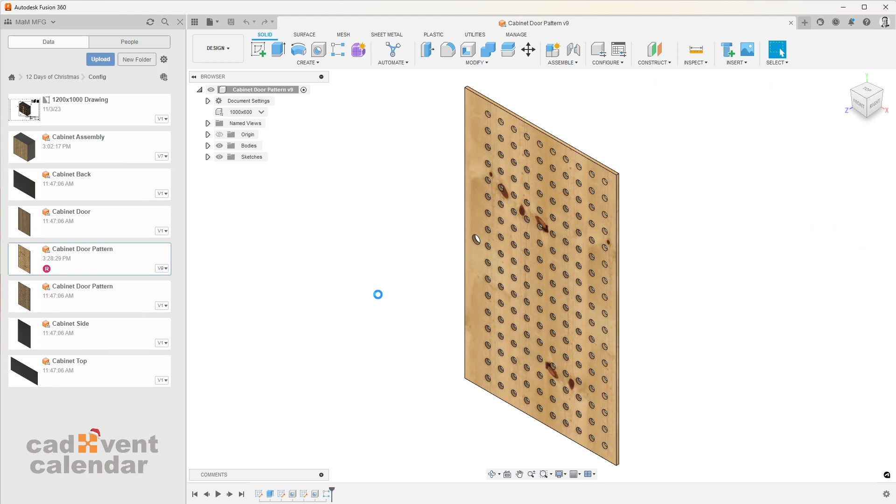Now, we can't talk about Fusion 360 without looking at what it can do from a manufacturing perspective. And I'm literally scraping the surface today because I'm not going to pretend to be an all singing, all dancing computer-aided manufacturing whiz kid. I can run a toolpath, I understand what that's doing, but I'm going to scrape the surface.

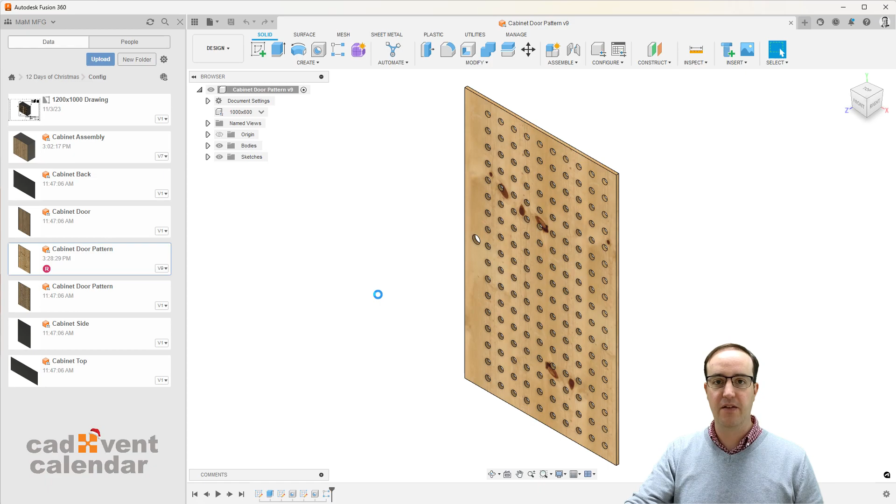But take it from me, the amount of functionality there is in here to allow you to generate anything from a simple toolpath like I'm doing today all the way to a multi-axis toolpath. Fusion 360 has the ability to do that for you, and that can be extended with separate subscriptions to allow you to do so much more, including machine simulation, to be able to see how the machine's moving around and what it's doing at any particular point in time, and checking for clashes and things like that.

So with this file that we had open earlier on, we're going to go straight into our machining and manufacturing environment. We could create a setup. We don't need to do that inside of Fusion, but we could if we wanted to. I'm going to go straight in and create a 2D contour, selecting the geometry of this top face.

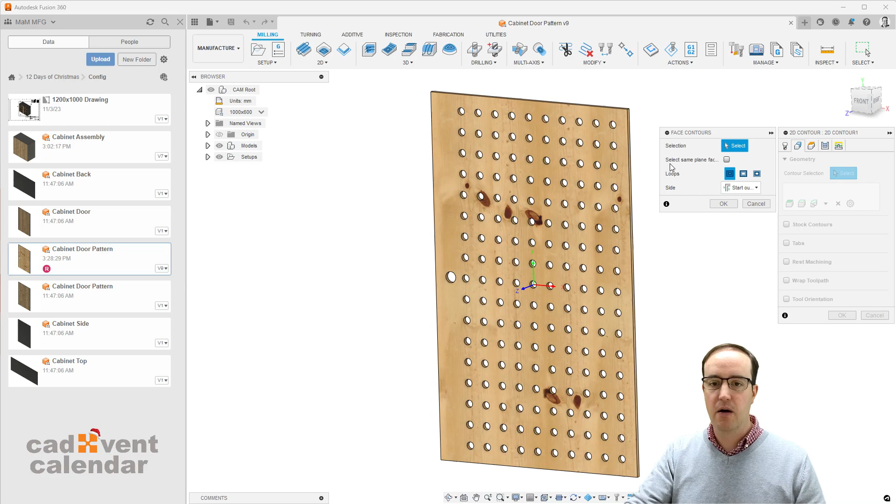If I hit OK, Fusion will then try and generate a toolpath for the outside and every single one of these holes. Might not be the best way of doing it, but this just shows you how quickly you could get started. I'm going to set my bottom to be the underside of the model, to make sure that the depth is correct. And then I'm going to go ahead and press OK.

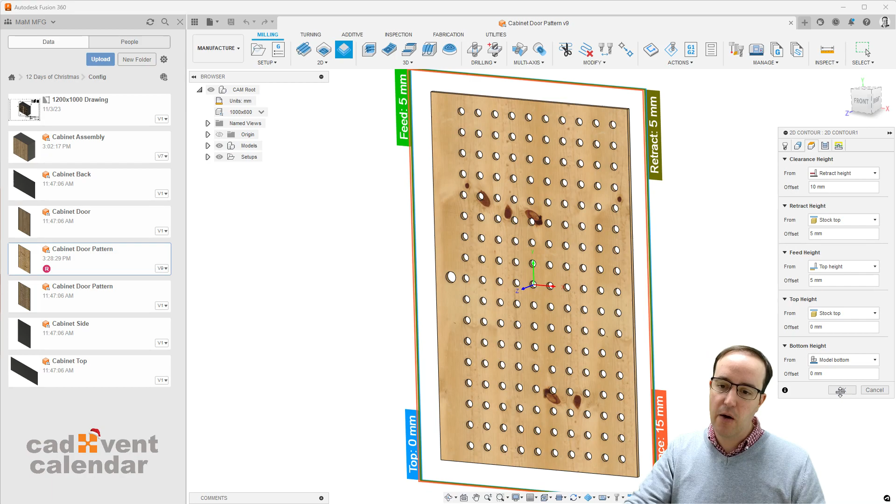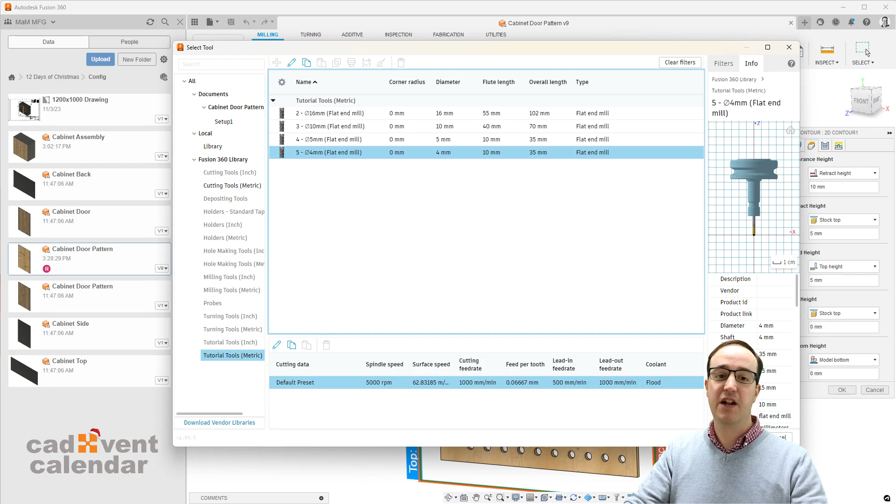Fusion's going to ask me, what tool do you want to use? So for the purpose of this, I'm going to choose a milling tool, maybe a flat mill, just 4 mil. Again, I'm not a CAM machinist, so please excuse my incompetence from this perspective, but we're going to choose a mill that's appropriate for the job, and Fusion will generate our toolpath.

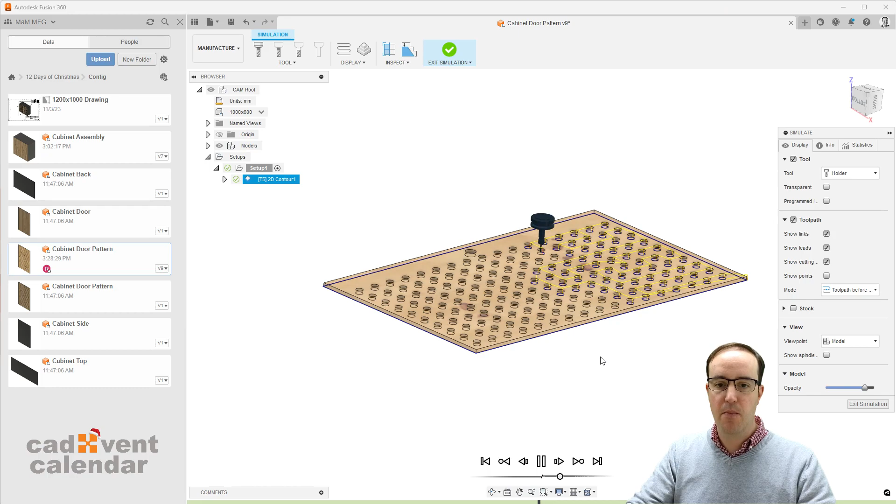We can see the toolpath on our screen here. Let's just get into a bit more of an isometric view. Go ahead and click Simulate and press play. And as you can see, the tool goes round and it's following that toolpath. At any time, I can speed up or slow down that simulation to get a bit more of a visual as to what's going on.

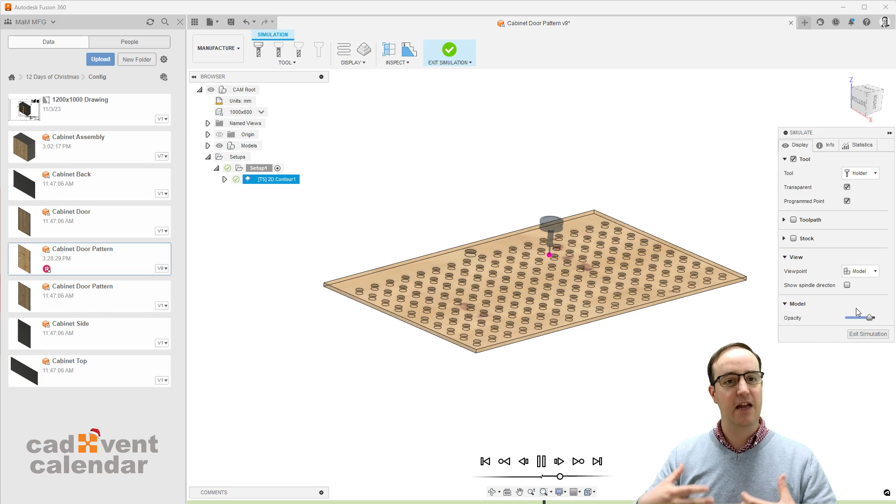I can hide the toolpath so it's a little bit more visual. I can choose to make the tool transparent. I can make it show me the programmed point to visualize that. And I can also start looking at showing the stock, so I can see things being removed and make it quite a nice visualization, which again is quite a nice thing to be able to do on the system here.

This could then be exported straight out to G-code, so straight onto your CNC machines to be able to pick up and work through a post-processor. So it's got loads of support from all the top machines like you would expect, but the ability to model and then manufacture using that model and send the G-code straight out of Fusion to the machine. Again, it's quick and it's easy, and there's so many tips, tricks and tutorials out there on the web for you to follow along.